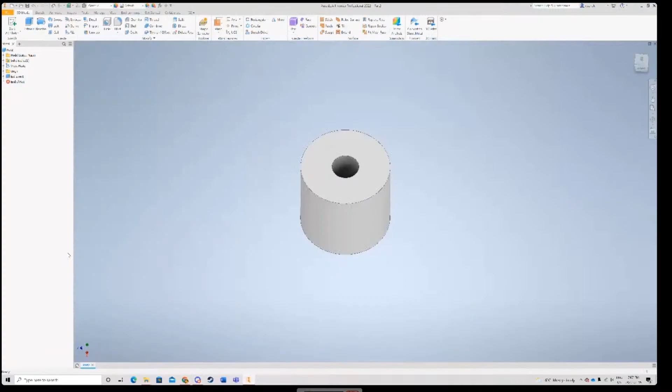Okay, I'll continue. So now that we have this extruded, we're just going to fillet the corner. We're going to fillet it 2 millimeters, just like that. And now we should have this shape. It's basically just like a dome.

So now that we have this, we want to actually toggle the visibility of the XY plane. To do this, in our model tree on the left-hand side, we're going to click the drop down on the origin, and then select the XY plane. We're going to right-click it, and there's a button that says visibility. We're just going to click on that, and what that's going to do is bring up this center plane that we have over here.

And from this, we are going to want to make 3 offset planes from this plane. Basically, this is defining the planes that the propeller blades are going to loft through. If I go up to the top, there's a tool called the plane tool, the work plane tool. It's like this orange square with a white square in it. We're not going to click on the tool, but we're going to click on the drop down, and select offset from plane.

Hey, sorry to interrupt, but if you have a version of the part you're going to make saved somewhere, would you mind opening it up just to show what we're trying to make today? Yeah, okay, sorry, I should have mentioned that.

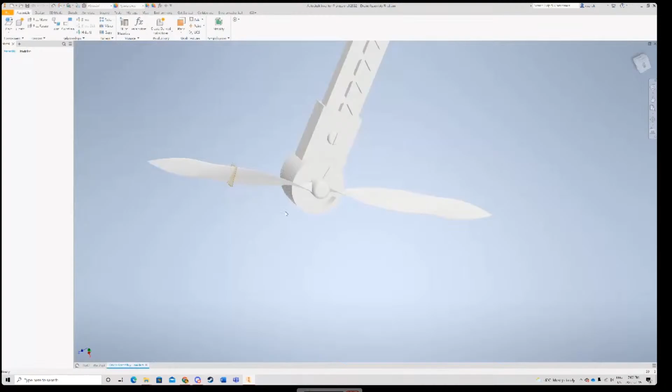So basically what we're making is this propeller blade. If you attended some of our other workshops, you may recall we had a drone body with a drone assembly, so I have this open here too. We made this a while ago. Basically what we're doing is making a more advanced version of this propeller that can fit on top of this motor housing the same way that the one provided to you will. So it has the same inner and outer dimensions as this one, but it's got a bit more of a complicated shape, just so we could show off some Inventor tools, mainly focused on making more advanced lofts in this workshop. So this is the final product we're going to be working towards, just so you guys can have an idea of where we're going. Thank you for mentioning that, I'll keep that open.

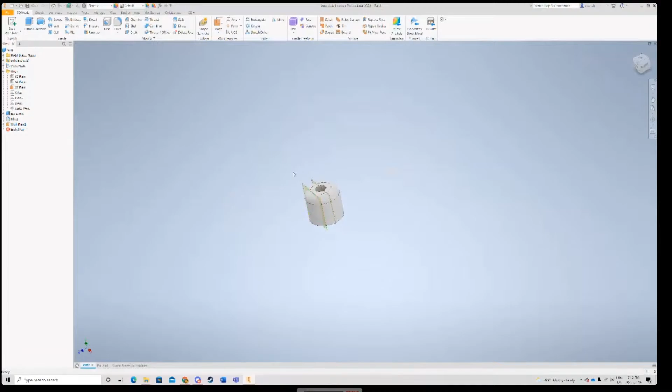So what we're going to do next, now I'm back to the part, is we're going to offset from this XY plane. We're going to make 3 offset planes. One is going to be 3 millimeters out. Here, I'll turn this around. And if you didn't know, you should always use Inventor with a mouse, not a trackpad. I know some people did that in first year, but it's so much better with a mouse. You can shift middle mouse to rotate around the center point.

So I made this first plane 3 millimeters offset from the origin XY plane. Again, from the origin XY plane, I'm going to offset another plane, and this plane is going to be 33 millimeters out. Then I'm going to do that one more time. Again, all 3 of these are coming from the center XY plane, and this plane is going to be 100 millimeters out. There we go, so 3 planes that look just like this, and this is basically what you should have. So these 3 planes are going to be the surfaces that we're lofting through.

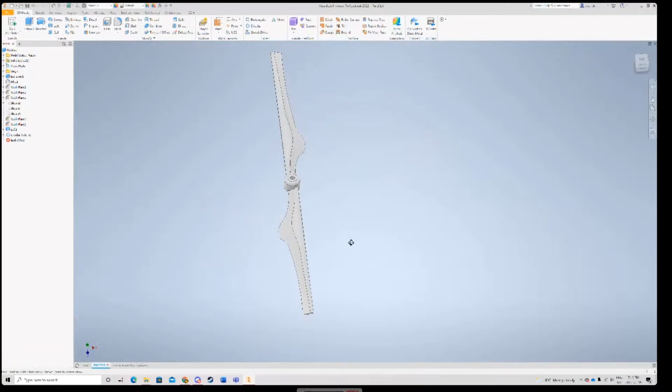If I go back to the final product, you can see it's kind of angled downwards here, and angled downwards here. So we're going to make 3 sketches for this loft to follow along. The first plane we're going to start with is the 100 millimeter plane, all the way on the end over here. So we're going to start a sketch on this plane. Sometimes the body might be rotated, so to change that, you can use this cube, clicking these arrows on the sides to rotate the view properly if it doesn't look right, as a quick way to orient it correctly.

We're going to use this tool called project geometry at the top when we're in the sketch on the 100 millimeter plane. What we want to do is project the body of this cylinder, so we're going to make sure the body is highlighted here, like this circular ring. That's going to give us the top and bottom projection of this cylinder. And then we also want these lines on the side to make a rectangle that has the dimensions of the projection of the cylinder.

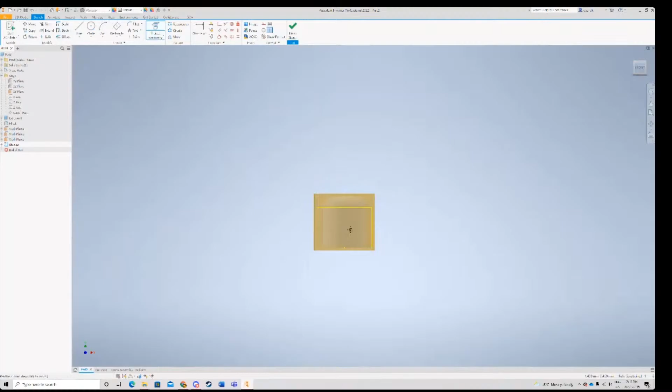To get that, you'll need to move around on the cylinder. You'll find this line on the left side. If you click on that, you should get a line that appears on the left. On the right side, there should be not this one, because this line is actually the inside of the inner cylinder. But if you go more towards the outside and click on the edge, then you should have this rectangle, and this is what you want. You should have a rectangle that looks like this. Once you have that, you're done with the project geometry tool for now, so you can just press escape to get out of that.

Then you want to make a center line down the middle of the part. I'm just making a line that's going from the top of this to the bottom, dividing the projected rectangle that we made into two parts.

Now the next thing we're going to do is use the 3-point center rectangle. If you click the drop down in rectangle, you can find it over here. Before we actually make our line on this sketch, I want to change to construction mode. If you see where my cursor is highlighted, there's a button that says construction. Basically this just makes the lines dotted instead of solid, and that makes it easier to see what is actually part of the part and what you're using to line things up. So I just selected that.

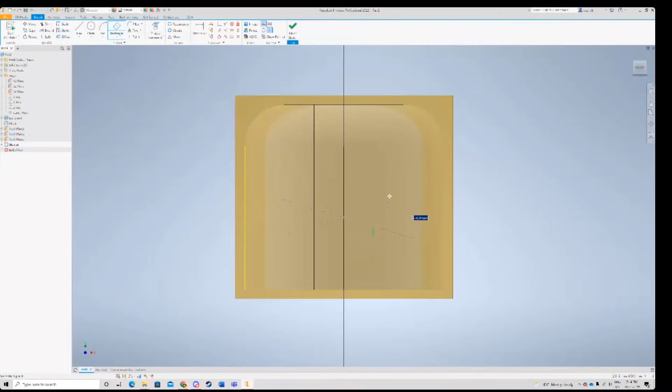Now, still in the 3-point center rectangle tool, I'm going to select the middle point. You can go up and down along the center line, and it'll turn green at the middle point. I'm going to click once in the center, and make a line that is 7 millimeters long. For degrees, just keep it at 0. Then I'm going to make it 1.6 millimeters high. So then I should get a rectangle like this that is dotted, and it'll have these crosses on it as well.

Once I have this rectangle, I'm going to make one more dimension, not with the rectangle tool, but just with the line tool. I'm still inside of the construction line view. I'm going to click from the top of the rectangle we just made, not from the center, but from the top of this rectangle. I'm going to go over to the right 1.75 millimeters, 0 degrees, and just dimension that over there, just like that.

Now I'm going to exit out of the construction line view. At the top, I'm just going to deselect construction over here, and this is going to make it so we can just make those solid lines again.

The next tool that I'm going to use is the 3-point arc tool. What this does is basically make an arc where you can define the endpoints, and you can also define the center point of the arc. To define this, I'm going to click once on the bottom left-hand corner of the rectangle we just made, then click once on the top right-hand corner of the 1.75 millimeter line we just made, and then define the radius of the arc to be 15 millimeters.

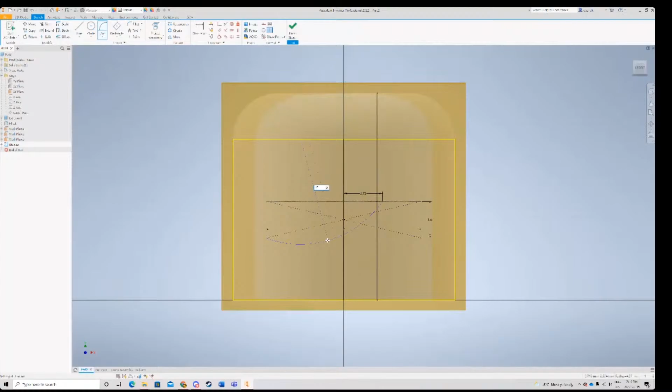Now you should have a line that looks just like this, with an arc that looks about this shape. We went from the top right corner of the 1.75 millimeter line to the bottom left-hand corner. And this black line, just ignore it—Inventor just kind of makes those sometimes to line things up.

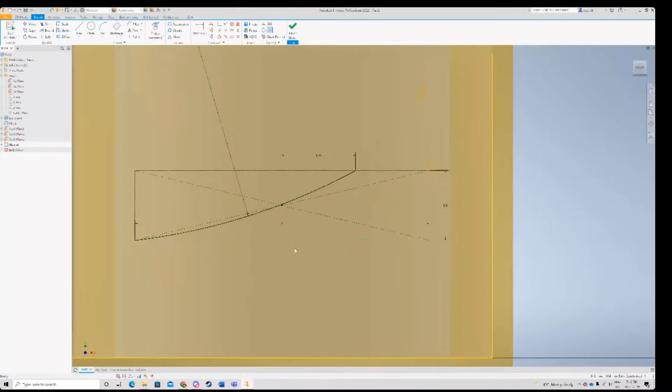Now that we have this line, we're going to draw a line along the bottom of this rectangle to make it real. I'm not actually going to draw a line here. What I'll do is select the construction line at the bottom, then click the construction line tool we used earlier, which will toggle it from being a construction line to a normal line. So now it's solid instead of a construction line.

Hey Kieran, just to make it easier to see, there's a button at the bottom of your Inventor, the one to the left of that one. Oh yes, slice graphics, if you just enable that. Oh okay, it looks like it didn't really do anything. Okay, never mind, never mind.

So what that button is supposed to do is, when you're making a sketch on a plane that's sort of inside some geometry, it basically gives you a section view of the geometry. But I forgot you were sketching on a plane that was all the way up there. I think that'll be useful though when I go to the 3 millimeter plane, because the way I did that was I toggled the visibility, but instead that could be useful. Yeah, sorry, keep going. No worries, okay, what I'll do is angle the view a little bit so it doesn't have all these planes in the background, so it's a bit more clear what's going on.

So yeah, anyway, where were we? Okay, so we just made this line. The next thing we want to do is make a fillet that's going to give that aerofoil shape of the wing. So we're going to use the 2D fillet tool, up here right next to the rectangle tool, and we're going to make a 1.5 millimeter fillet.

For the 2D fillet, you want to enter the dimension before you actually make your selection. So radius of 1.5, and it's going to be between this line we just made, this arc, the 15 millimeter arc, and the most right-hand construction line. It should highlight green like this. If you click on the two, it should make this arc that gives this kind of smooth shape.

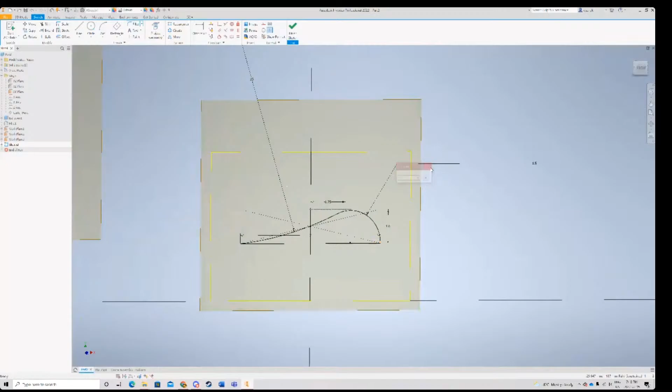This part is a little bit annoying because it doesn't actually join up with the edge, and this is something you're going to have to pay very close attention to. So now we want to close the gap between this line, this arc, and the bottom.

What we're going to do is zoom in all the way on this corner. You'll see this construction line is dotted. The same way we did before, we can just turn that into a real line, and this should be joined now. Actually, I'm not sure if that exactly joined it.

I think a better way might just be to make a line that connects from the bottom of that corner to this bottom corner. Your line should be 0.048 millimeters in length, so just double check that your line is that length, because if it's not, that means you probably selected something a little further up. But yeah, okay, so that's how we did that.

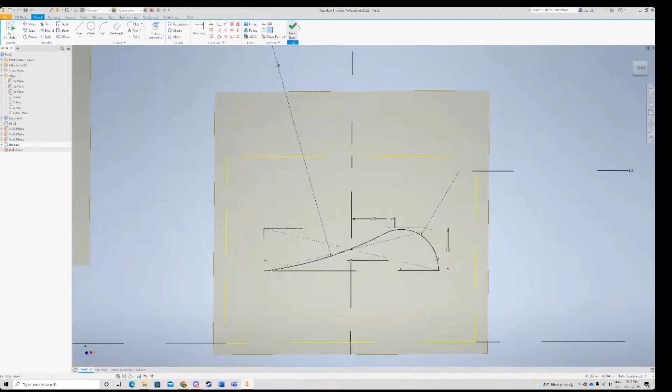So now we're basically done with this end sketch, so we can just finish that sketch over there. Going back to our final part, what we just made was this very end sketch. You can see this is very far out from the body, so that was the purpose of this sketch, to define the endmost plane.

Now the next thing we're going to do is try to get that body rotation. If you notice, this has this bent shape, this bent sort of geometry. To get that, we're going to make a new sketch on this work plane. But before we do that, I'm going to toggle the visibility of our solid body so it's a little clearer what we're doing. I think one more thing we can do is also use that section tool.

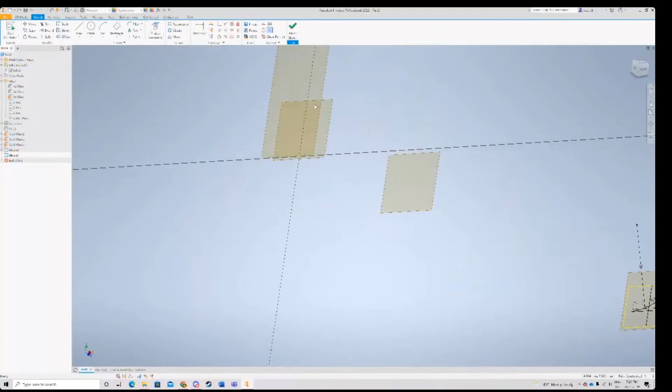That section tool also, but I'll just turn the visibility off for now. So I'll make a sketch here on this first work plane. Keep in mind, this is not the plane that divides the solid body in half. It's the one that was offset 3 millimeters from the center. So that's the plane that we're making a sketch on. This one right here, not this one.

So once we made this sketch, what we're going to do is we're going to project our geometry all the way down from the sketch that we just made. And these are the geometry pieces that we need. So we need this entire aerofoil shape. So we're going to click on this curve, the bottom curve, the fillet curve, and we also need to remember to select that tiny little piece.

Oh shoot, where is it? Sometimes Inventor is a bit finicky. We also need to select that tiny little piece that we use to, oh, there it is. Oh my God. I had it for a second there. Jeez. I think maybe I should delete that construction line. Oh, of course, now it wants to select. Oh, really? I didn't know that. Okay. So if I just curve. Oh, there we go. Awesome.

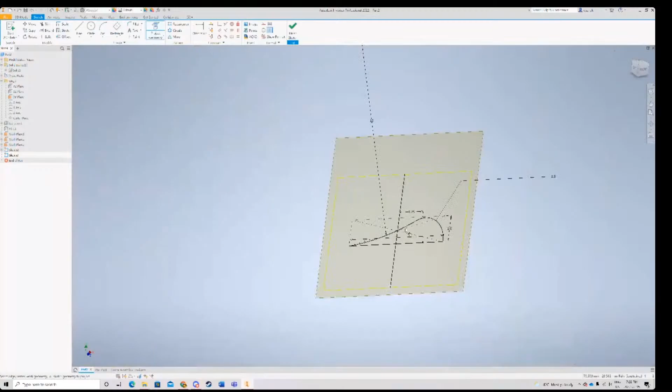Thank you. So yeah, just make sure you select the one that's solid and not the one that's dotted. Awesome. Thank you so much. I actually did not know about that. It's an awesome tool. So we have projected those four, and now we just need to project the center line. So those are the 5 lines that we need to project down from our sketch. So the entire curve as well as the center line that divided it in half.

So now we can exit out of the project geometry tool. We can forget about this sketch that we made. We're going to focus on this plane over here. So we actually don't want this curve to be associated anymore with the tool that we projected it from, because right now it's kind of bound. Like it has a constraint that says it has to match the projection of this curve. We want to get rid of that.

So in order to do that, we're going to highlight all of the selections that we just made. So again, 5 lines you should have. We're going to right click and we're going to click on break link. And it's going to be unconstrained, but that's all right for this workshop. Now we should have basically still an identical projection of this sketch down onto this plane, but it's no longer linked to the geometry of the other sketch.

So now that we have this, we want to rotate this 25 degrees counterclockwise around the center point of this aerofoil shape. So how are we going to do that? What we need to do is we actually need to break this line. And in order to do that, we're going to use the split tool. The split tool is up here. If you go next to the 2D sketch, it's right next to rotate, between rotate and offset.

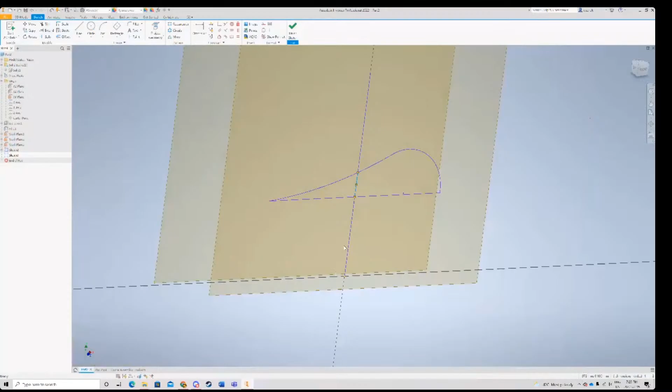The reason why we did that is because now we can use the point tool, which is right next to the rectangle tool. If you see where the 2D fillet button is under text, the bottom one right there, point tool. And we can make a point that is right in the center of this new line. We couldn't have done that before, because it would have locked on to the center of this long line, which is not the same as the center of this small line. So now that we have this, we're going to make our 25-degree rotation around this center point.

So we're going to do that by clicking on the rotate tool. The rotate tool is right next to where that split tool is that we just used. So now that we clicked on the rotate tool, we have to specify two things. We need to say what lines we're rotating and what point we want to rotate the lines about.

So make sure that you have the top box highlighted, not the bottom box. And when you have the top box highlighted, you want to select everything that we use to make that aerofoil shape. So that includes these 3 big lines and this one corner line. I know this is really annoying, but it's important not to forget about this one small corner line, because if you do forget about it, the sketch won't be closed and you won't be able to do your lofts correctly.

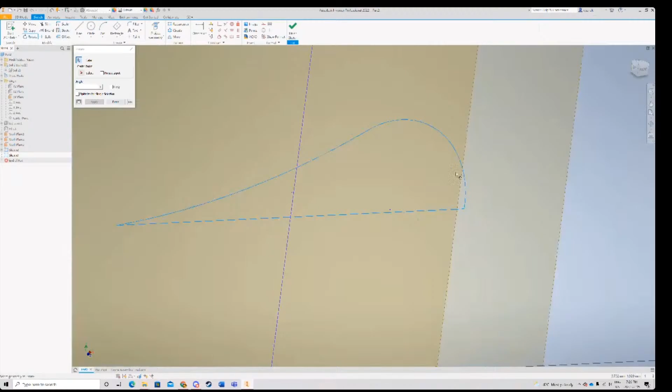So each time, just keep in mind 4 lines pretty much. You need to be selecting them at all times for the aerofoil shape, because those 4 lines create this closed shape. So now that we have those 4 lines selected, we want to click on the center point dialog box. And for this center point, we can just select that point which we just made. The cursor should turn green when it's right in the center over there.

You'll get this pop-up which is saying it's constrained to other geometry. That's just because I think the point has a perpendicular constraint to the line, but you can just select yes for this prompt. We don't really care too much about the constraints here. Half the sketch is unconstrained anyway. And you can see the angle box is highlighted. We just want to type in 25 and then hit enter.

And now we should have this kind of shape with the aerofoil on one end being angled 25 degrees downwards, and on the other end it is straight. If we zoom all the way out, this is what we should have at this point in the sketch. So hopefully all of your sketches are looking like this. It's basically the same sketch but rotated 25 degrees about this point on both ends.

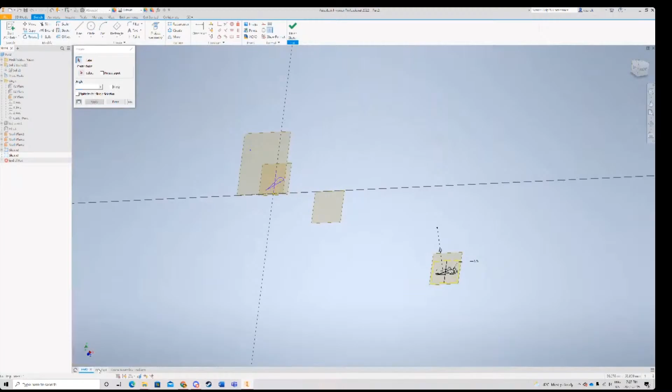And if I compare it to the final part, you can see how we're getting there. The 25-degree rotated sketch, if I highlight this, you can see it's on the far end. The straight sketch is on the other end. The next thing that we want to do is make this middle shape. So where it's bulging outwards, we want to make the sketch that defines that.

So in order to do that, oh, sorry, I should have said we can exit out of this rotate dialog box. We can finish this sketch. Now we want to go into the center work plane, which was 33 millimeters away from the main plane. So we're going to start another sketch on this plane.

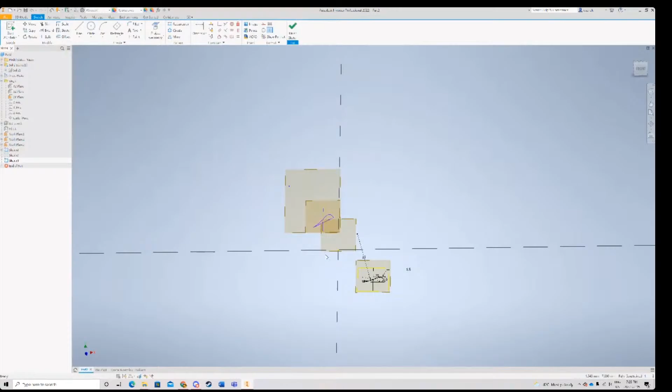Once we started the sketch here, we're going to project a couple of lines down to help us make sure that everything is lined up correctly. It'll just make our lives a lot easier when we're making this center sketch. So the lines that we're going to project, again using this project geometry tool, it really helps out a lot when you're trying to do this kind of thing with repeated lofts with similar shapes.

So we want to project this whole box from the first sketch that we made and the center line. And then from the second sketch, we want to project this line that's angled downwards. So I'll highlight that again. This bottom line that is angled downwards at 25 degrees is what we're projecting from this sketch. And this whole box outline with this middle line is what we're projecting from the first sketch. Once we have those lines, we can exit out of the project geometry tool.

The next thing that we want to do is make a rectangle, but it is a construction rectangle, just like before. So I'm going to click on the construction tool to change the lines that we're making from solid lines to construction lines. And then once again, actually, I don't think we use the 3-point center here. We just use a 3-point rectangle.

So we don't use 3-point center, we use a 3-point rectangle. And the reason why we use a 3-point is before we were making the rectangle from the center of the shape, but now we want to define the rectangle from one corner to the other corner and then the height. So make sure, once again, just use 3-point, not 3-point center.

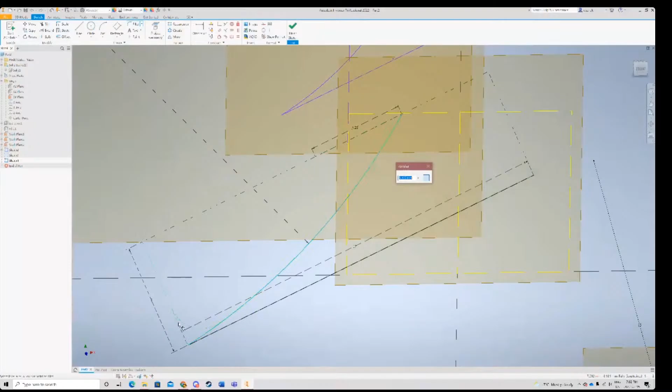Oh, what the heck? Oh, I think I accidentally had the bottom selected. Just gonna undo that. So a fillet between this arc that we made, the 3-point arc with the 27 millimeter radius, and this side. And sorry, this should not say 1.5 millimeters. That is why I'm not getting a selection. This should say 4 millimeters. And now you can see if I highlight this, it'll give me the little preview. Preview basically indicates that you're good to go whenever you do a tool.

And I don't know why it keeps sending me back to the construction lines, but anyway, I'll keep going. Once again, just close up this gap over here on the right-hand side. I think this is what was causing the problem. I think it is okay just to change this line from a construction to a solid line. I think what was interfering before was just this dimension tool, and that's what I was highlighting. We should be good if you just highlight this bottom right-hand line and turn it from a construction line into a real line.

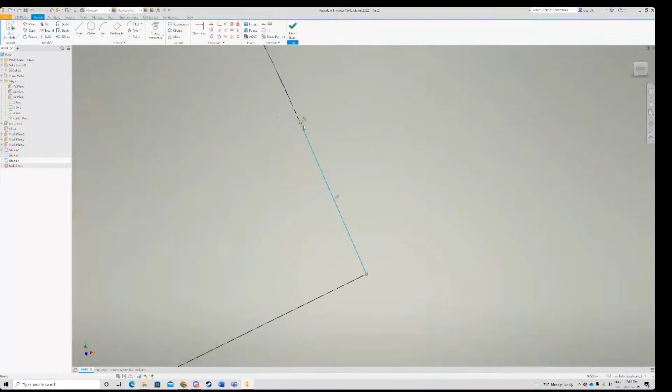But if you decide to just make a line, it should be 0.36 millimeters from this corner down to the bottom, and that's so you know that you selected the correct 2 points and you successfully bridged the gap. So, I believe that is it for the center sketch, actually.

So now you can kind of see how this is coming together. We have these 3 profiles, and we want to make a loft between the 3 that will make this part. And you might think, okay, well, why can't we just do this loft right now as is?

So I will show you why. If we select this plane and then we try and loft through these 3 sketches, and then I click okay. Oh, I forgot, it was not visible, so I'm just going to toggle the visibility for now. You can see we get this taco, quesadilla-like shape, which isn't what we were really going for at

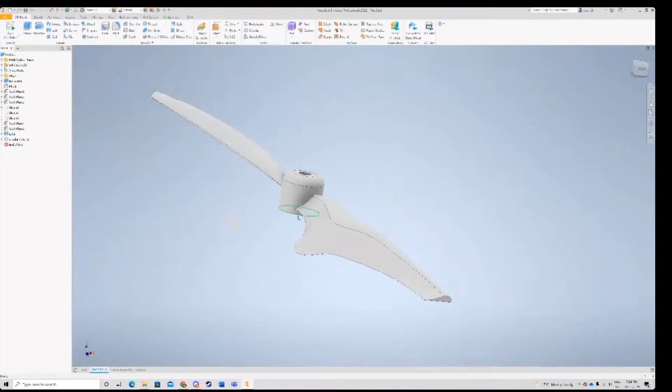all with this part. And the reason why is because Inventor just takes the smoothest path between 3 profiles when it does a loft. If we want to actually get this cool aerofoil type shape, we need to tell Inventor what lines it needs to follow to make the path. And to do that, we're going to make use of something called rails. So if you click loft, you can see there's this selection that's called rails.

And I don't think you really touch on this at all in first year. But basically what the rails feature does is it allows you to define the path that the loft is going to take. So the rule for rails is that they need to be touching the sketch at all times. All 3 profiles that you loft along, the line for the rail needs to be touching all 3 of the sketches at all times. So how do we achieve that?

Well, we have 3 sketches, and you guys are taking linear algebra now, so I don't know if you learned it yet, but hopefully you should know you can make a plane out of any 3 points in a vector space. Okay, maybe I'm giving you guys PTSD, but I'll shut up about linear algebra.

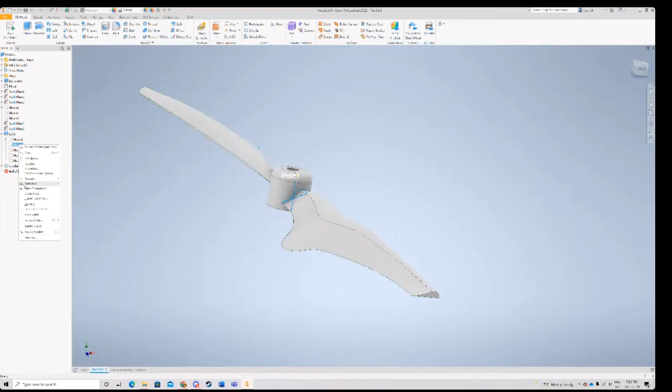So you go to the plane tool, and there's a 3 points selection over here. This is actually what we're going to select, the 3 points tool. And I'm going to go back because I think it's good to visualize what we're doing. Oh man, I should have unhid these sketches, so I will do that really quick. Sketch 3, sketch 4, and sketch, not this sketch. That is, spoiler alert, what we're doing next.

But you can see that we are basically defining a line that's going along this edge, and then we're also defining a line that goes along the back. So the points of intersection that we're going to use for the rails are these corner points from each sketch, and then the back points from each sketch. So in order to make sure that our line is always touching the sketch at those points, we can make a new plane that is defined by those 3 points.

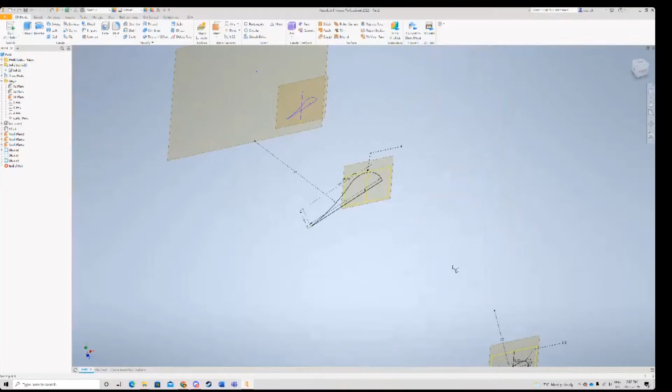So in order to do this, we can click on the plane dropdown. Okay, I've done this like 4 times. And then you click on 3 points. The 3 points that you choose are the corner points from each of the sketches. So we choose this point over here, this point over here, and this point over here. And Inventor will automatically make a plane with all 3 of those points lying along the plane.

And we can do the same thing, basically. We could do it now, or we could do it later. Okay, I'm just reading the handout. It looks like in the handout we do it right now, so I'll do it right now as well. It might look a little messy, but we can clean it up later. So we're gonna use the 3 points tool once again, the exact same tool.

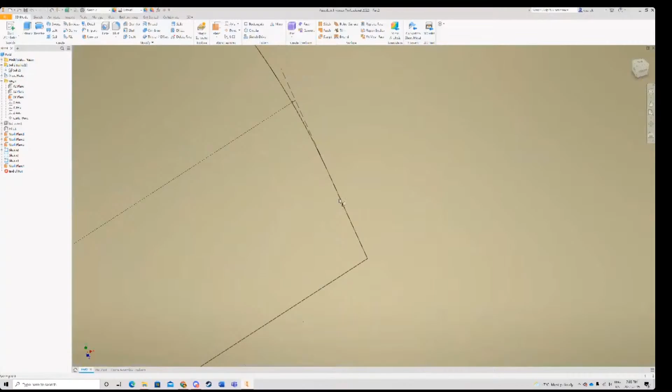And once again, I'm gonna stress, if you remember, we had this corner line, this small corner line that we made. We want to select the very corner of the aerofoil shape, not this line. If you zoom out, you can see that there's actually 2 small points here, and it's very easy to confuse which one you select. So you want to make sure that you're selecting the very corner of each of the 3 shapes.

So we're going to select the very corner over there. I'm going to zoom in a ton, make sure I'm selecting the very corner of this one. And we're going to go over here and I'm going to zoom in a ton again, and make sure that I'm selecting the very corner of this one. So now I have 3 lines that are going through the back corner of these 3 planes.

So now what I'm going to do is I'm going to go onto the first plane that we made. So the first plane that we made was between these 3 left-hand pointy parts of the airfoil. And I'm going to make a sketch on this plane.

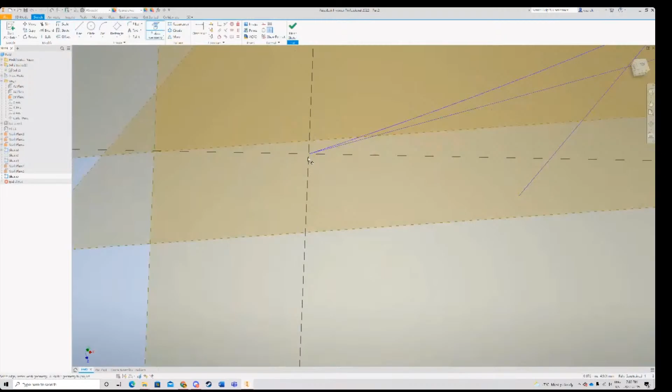Now, even though we defined the plane to have these 3 points lying on it, these 3 points aren't actually defined in the plane. You can't lock onto those 3 points at all. If you make a line, if I try to select that point, it won't actually be there on the plane. So in order to have those points to lock onto, we need to use the project geometry tool once again. And we need to click in a very similar fashion to how we made the actual plane. We need to click on the three tips of the airfoil.

So once again, I'm just going to go 1, 2, 3. And then you should have these 3 little point dots from those 3 tips. So now that we have that, I'm also going to project one more line. And this is just going to make things a little bit easier for us, just to line things up. The same reason why we projected these lines, to help line everything up for how we were making the airfoil. I'm going to project this bottom line from the center sketch.

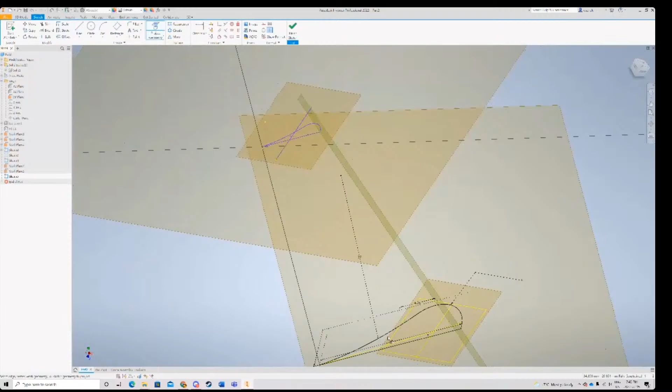So the same way we projected this line onto this plane, we're going to project this big line onto the bottom plane. And it's going to give us this line at the bottom here, basically this yellow line. And I realize now there's a lot going on the screen. So I'm just going to finish this sketch. I'm going to come back to it, but I'm going to hide some of the other sketches just so that it's a little bit easier to see what's going on.

So I'm going to hide sketch 4. I'm going to hide sketch 3, and I'm going to hide sketch 2. And this is just to clean it up a bit, because there's so much going on in all of these 3. It's a little bit hard to see what we're doing. I'm going to go back into that sketch now. So I'm not going to make a new sketch. I'm going on the model tree and I'm clicking on the sketch that we just made and I'm re-entering it. And this is the sketch we projected all of the points onto.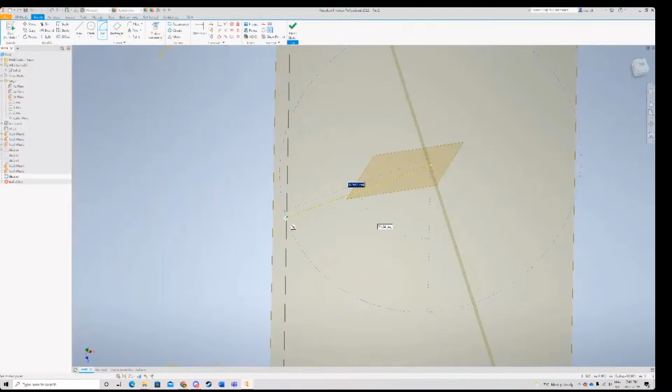So now that we made this sketch, what I'm going to do is I'm going to make a center point arc. So the center point arc is going to be from the line that we just projected. So the very right hand end of the line, or I guess it depends on how you have it oriented, but in my orientation, it's the right hand end of this line. And we're going to go down to the end of that center airfoil, where the point was projected onto. And then we're going to make a 60-degree arc.

And in the handout, actually, this is my bad. I should have maybe specified a little bit more. But it's actually mirrored. So there's a 60-degree arc over here, but this isn't the full arc. So what we're going to do is we're going to use the mirror tool, which is in pattern under circular. And we're going to mirror the 60-degree arc. And we're going to use that center line that we projected as the mirror line. Then we can click apply and we can see that the arc has been projected all the way across.

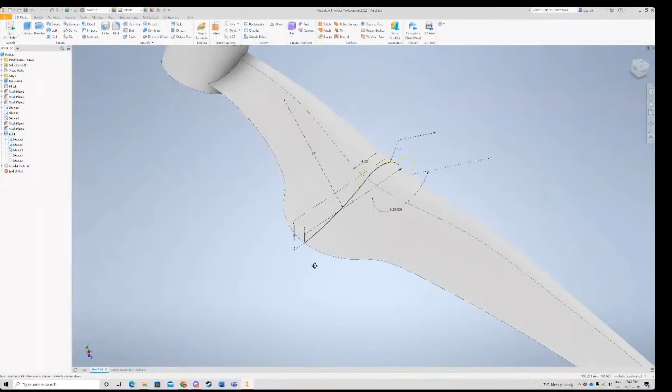Okay, one sec. This looks like it's going a little bit too far. Maybe it was a 30-degree. This looks more correct, but 1 second. Sorry guys, just give me a second here. I want to make sure I'm doing this correctly. So on the final part, we go into this sketch.

Okay, so it is actually 60 degrees from. Okay, it is actually 60 degrees from this line. All right. Oh, sorry. I should just close out of this assembly.

Okay, so that is actually 60 degrees. That's my bad. Okay, so once we have that 60-degree arc, we're going to change from, and keep in mind...

We use the center point arc tool there, a different tool than what we were using for the rest of this project. We're using the 3-point arc tool. That's why I didn't have to define a third dimension. But now we're going to go back to using the 3-point arc tool.

So for the 3-point arc tool, what we're going to do is click on the left-hand point that we made. This is for the sketch closest to that cylinder, not the sketch on the far end of the airfoil. This is the sketch on the close end that is offset by 3 millimeters from the center, and intuitively, it's the one closer to the arc we made.

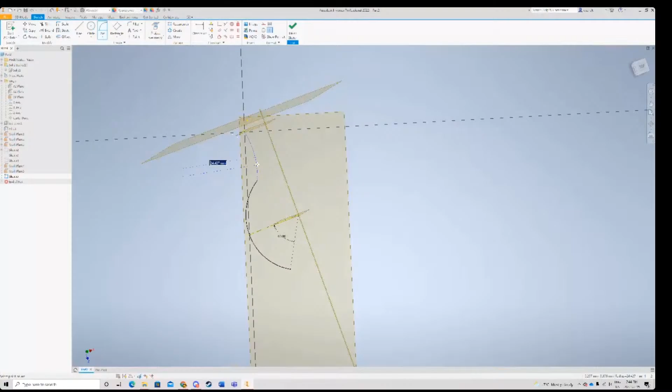So we're going to click on that point, the point joining to the arc, and we're going to make a radius of 35. And it should look like this.

And we're going to do a very similar thing between the right hand arc that we made and the point at the very end, and we're going to give this one a radius of 220, I just forgot the dimension there. So we should have something that looks like this.

Now what we're going to do is, this shape is a little bit ugly, so we're just going to smooth it out by using the Fillet Tool. We're going to give it a 2D fillet, 8 millimeters between this arc and this arc, and then also this arc and this arc. It's going to unconstrain the left side, but that's fine.

Now we have this shape that looks a lot more... oh my god, sorry, I don't know if you can hear that fire alarm in my house just started going off. Okay, never mind, it's good now. I guess my roommates figured it out. Hopefully my house won't burn down.

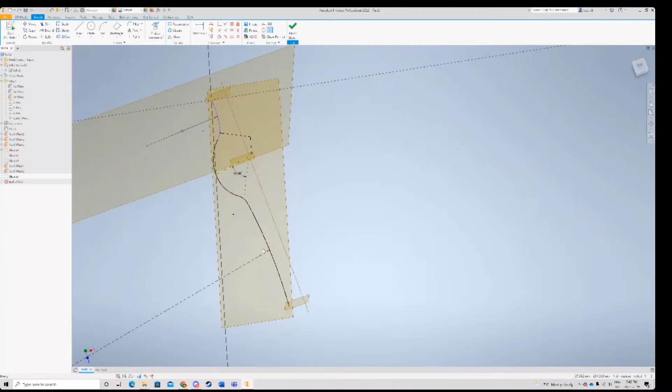But that should be good, actually, for this part of the sketch. That should be everything that we need. We have this 60-degree arc, and we can just finish the sketch off now.

So the next thing that we want is to do the back side. This is kind of like a long, skinny plane. Might be hard to select, but this is now what we're going to be working on to make the rail for the backside. So we're going to click this, click on Create a Sketch.

Now that we've done that, what we're actually going to do is... oh, sorry. Before we create a sketch, I'm going to re-toggle the visibility of all those sketches that we hid earlier.

Okay, awesome. So now these sketches are back. Now that these sketches are back, we're going to make this new sketch on this skinny little plane that we made. Very similar idea to what we did over here.

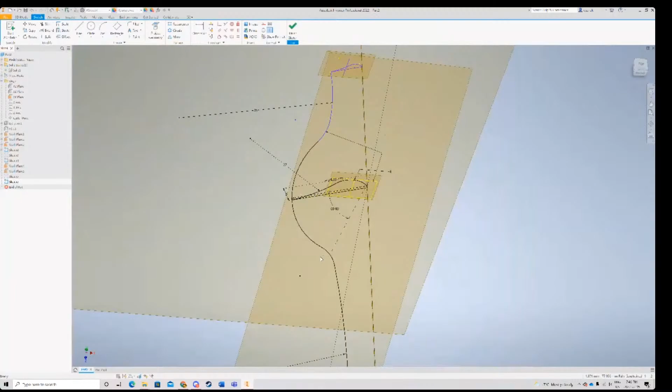So again, the reason why we made these sketches is because think of rails kind of like train track rails. Train track rails need to be touching the train at all times, otherwise the train will derail and won't go in the direction you want it to. Same way, think of the sketches as the train, and the rails as the train rails.

So it needs to be touching the sketch at all times. We can ensure that it's touching the sketch at all times if we make a plane that is touching the sketch, touching through all the sketches at all times. I might have explained that really badly, but sorry about that.

So once again, we're going to want to project the geometry. We're going to want to project all 3 corners of all 3 sketches. Again, I want to keep stressing, make sure you're projecting the correct point in the corner here, because if at any time you don't project the right point, your loft may not work correctly.

So this is also a good time to check that you actually made the plane correctly, because if you did, when you project all three of these points, they should appear on the plane at the identical location that you clicked on.

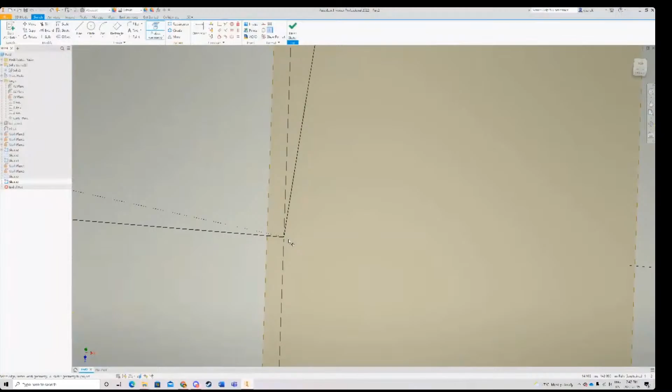If, for example, I click over here, you can see that the yellow point doesn't actually appear where I'm clicking. It appears slightly off. Oh my god, what did I just do? Okay.

It appears slightly off to the side, which means the plane isn't actually lying along that point. If you click on this bottom point and find it's not appearing exactly at the point, I'm going to delete that. That means you probably accidentally made your plane through 3 points using the top of this line instead of the bottom. So you want to redefine that plane.

Okay, now that we've done that, this part is pretty simple. We just want to make a smooth line going from this point to this point to this point. To do that, we're going to use the Spline Tool, specifically the Interpolation Spline Tool, not the Control Vertex Spline Tool, because the Interpolation Spline Tool will make a smooth curve that always goes through the points we selected.

This one is very simple. So we use the Interpolation Spline Tool. All we do is click from point to point to point. So we click on this point, then we click on this point, and then finally we click on this point.

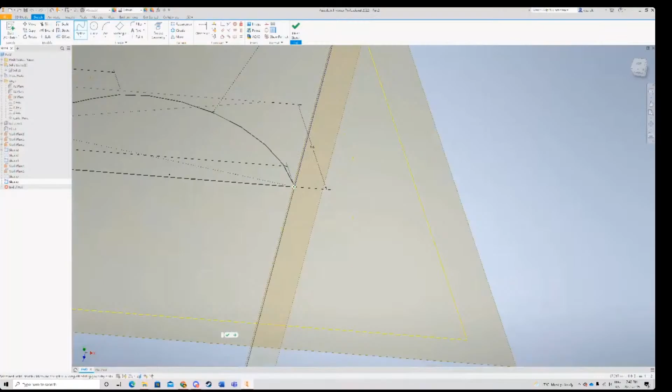Click check. Sorry, actually I just realized... okay, everyone's still here. I just wanted to make sure, like, it was kind of quiet. I wanted to make sure my Wi-Fi didn't cut out, and I was getting worried actually. So okay, good that we're still live.

Okay, awesome, so now we're actually basically almost done this part. I'm gonna hide a couple work planes and talk a little bit about what's going on. I don't know if there's a faster way to mass hide all of these instead of selecting them manually, but I'm just going to select them manually. So these are the sketches that we made, and it's kind of cool, we made almost a wireframe model of what we're doing.

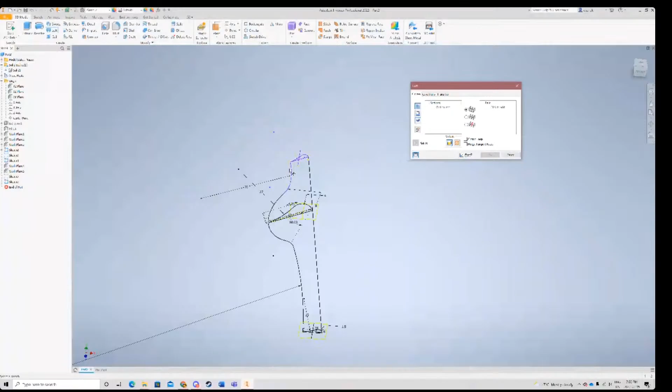So I'm gonna go back into the loft tool, and when I click the loft tool, you guys should follow along and do this as well. I'm going to loft from the back plane through the center plane and through this - you have to click to add another sketch - and through this back plane all the way at the end. Make sure when you select these 3, you're not selecting the box, you're selecting the inner airfoil shape.

You can see now that it's making this taco shape. So basically what Inventor is trying to do here is loft through all 3 of these planes using the smoothest possible line between these 3 points.

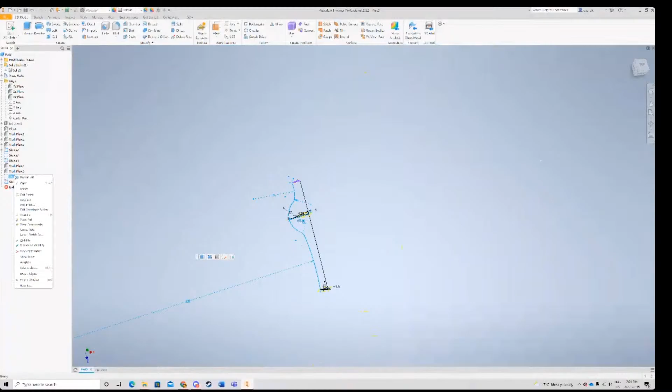So actually, before I go on to do the rails, I'll show you an example. That smoothest possible line is exactly what the Spline Tool does. If I go back into the sketch we made, these 3 lines along, and I make a control point spline between those 3 points touching the curve that we're lofting along, you can see that this is basically an identical profile to what the loft was doing - the same taco bell shape, if I use the Spline Tool and click from point to point to point.

And Inventor basically just does that everywhere - it makes a smooth spline between the points defined on the surface when you just use the loft tool with nothing else defined. But if you want the edges of the loft to follow a different path - oh my gosh, sorry, this is not what you want to do - click to add, select the sketch, then I select this, and then we add another selection here.

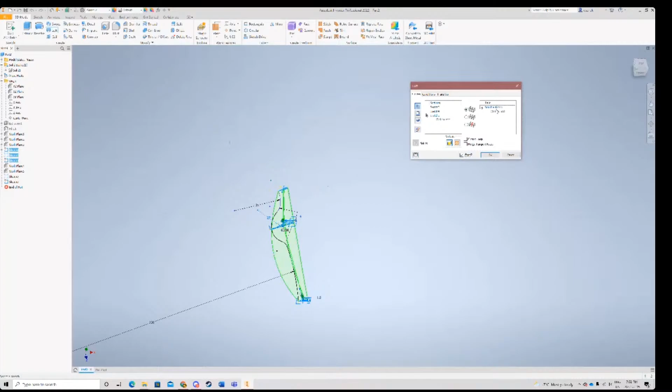Over here, awesome, we can instead make it follow a different path, and that is what these rails are for. So if I select, for the rails, I'm in the rails menu now - if I select this line, this sketch over here and this line, you can see that now on this end it's actually following this profile. But you can see the back, it's no longer doing a spline, it's making this weird wavy shape.

And the reason why is because once you define a rail, it kind of tries to mirror that rail - unless you do more and more rails to define exactly how you want your shape to be, it's going to try and mimic the shape on the opposite side. So that's why we made this back end rail, because this back end rail is going to restore that spline shape, and you can see that that's exactly what it does.

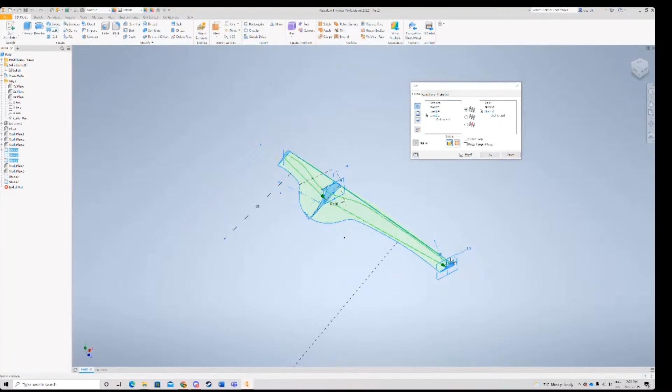When I clicked on that back end rail, we have this nice uniform airfoil shape going all the way from one end to the other end of the propeller. So I'm going to click OK here, and it's going to disappear. That's because I forgot to toggle the visibility back on. So if I turn the visibility back on, you can see that now we have this airfoil shape, and this is basically identical to what we had.

Oh, is this the same part? What am I doing? I'll just finish the sketch. No, it isn't. Okay, never mind.

So this is pretty much the same thing that we have over here, but instead, this one has 2 airfoils and this one has 1. So how do we get the second airfoil? It's very simple. You might be thinking we use the mirror tool, but we actually don't.

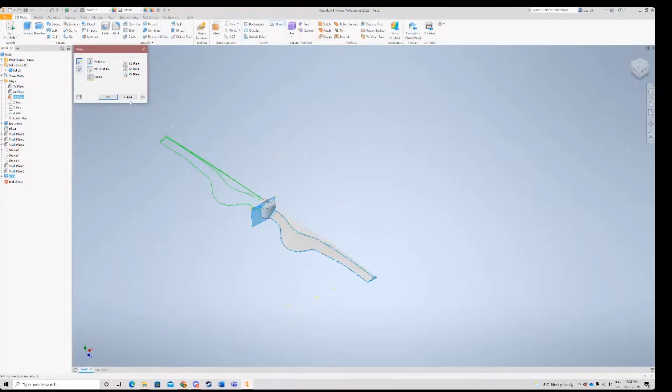The reason why is because if we use the mirror tool, I'll show you. So if I turn this mirror plane on, we don't actually get the shape that we want. We get the same thing on the opposite side, but that's not what we're looking for. We're looking for basically this to be rotated 180 degrees. And there's not actually a rotation tool up here.

So instead what we can do is cheat by using a circular pattern, which is kind of the same thing. I'll just rehide this plane because we don't really need it. The circular pattern tool is up here in the pattern menu, right next to the plane menu. We select it, and then there are 2 things we need to define.

We need to define the feature and the rotation axis. The feature we can just select as the wing that we just made. You should just be able to straight up select this big wing, and should have no issues with that. Make sure you don't select the center.

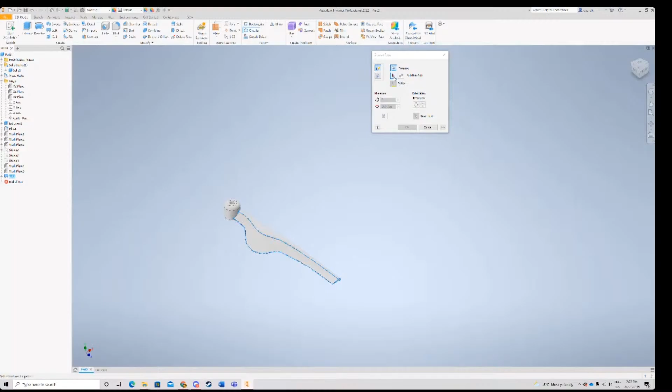Now the rotation axis, instead of a point, remember we're not in 2 dimensions anymore, we're in 3 dimensions. So instead of a rotation point, we now need a rotation axis. And to get this axis, it's very convenient that this is a circle. We can select basically anything on the circle - the inner cylinder, this outer fillet, the body. As long as it's circular, this will give an axis for it to rotate around.

So I can show you, if I wanted to select the inside, it all has the same effect. It's not changing at all what it's being measured on. That's because they all have the same axis, the same central axis.

But we don't want 6 wings over here, we only want 2. So I'm going to do a placement of 2 with 360 degree current angle. We could also do 3 wings too, I guess - this actually looks kind of cooler in my opinion with 3 wings. Maybe I should have made the handout with 3 wings, but whatever, too late.

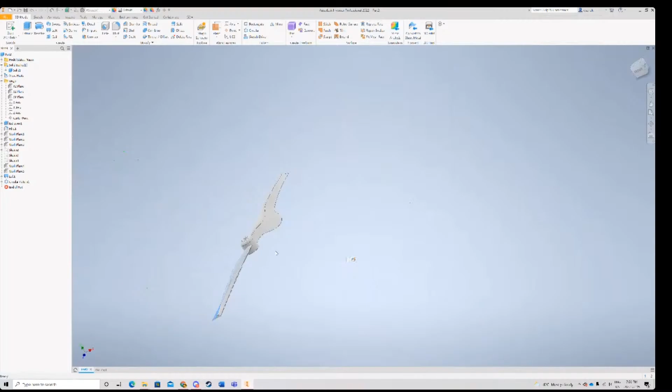Make the placement with 2 wings because that's what we did over there, and we just click OK. That's pretty much it, that's how we make this shape. You can see it's a much more complicated propeller shape than what we usually make, and this is kind of an introduction on how to use the more advanced part of the loft tool.

And maybe I'll also mention these other ones. So I'm not going to lie to you, I've never used this third one, this area loft, in my life. I don't really know what it does, but seems like we have more time than I anticipated in the workshop, so maybe we can figure it out. But before we do that, I'll talk about what I do know.

So instead of rails, which is what we did for this sketch, where we have these outside profiles that we loft along, we can instead use a centerline tool. Basically what you can do with the centerline is it kind of shows you - it's nice, it gives you a preview of exactly what the tool does. Instead of defining rails along the perimeter that are tangent to each of the sketches, you have to define a line that goes through the center of each of the sketches.

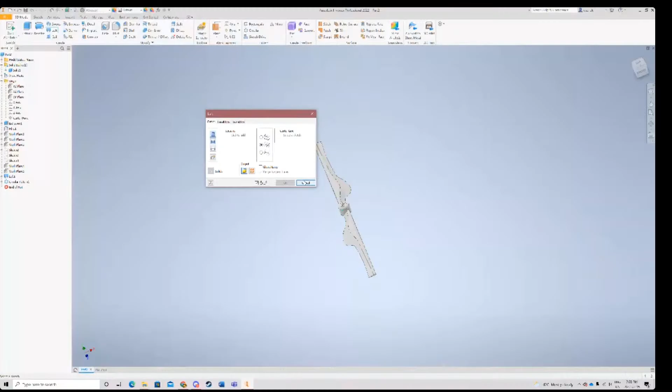So it goes in between; instead of going on the outside, it goes inside of all three of the sketches. And you can loft between that line, for example, I guess. So maybe I can show you what that does. I don't know if it's gonna work, but I can go back in this propeller design and I can kind of show off how to do a center loft instead of a rail loft.

But they are both kind of the same idea, where instead of it following the outside shape, you want it to follow the inside shape. Or not an inside shape. Instead of it following the default spline shape, you can get it to follow a path that you define instead. That's what I meant to say. Sorry, I don't know why what I said before is just complete jargon.

What else can we do to this? Oh, I have a cool idea actually. I think this isn't really talked about that much actually. There's a tool. Oh, here it is. We can use the bend part tool. Visible, unadaptive, sketch change. Okay. See if you can do it here. The bend part tool is pretty cool. I'll show you guys what that does.

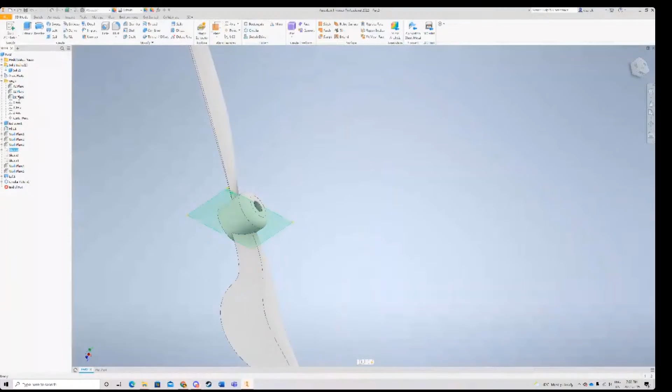I think. Okay, I'm gonna do this really ghetto. I'm just gonna make a sketch on this bottom plane, and I'm just gonna make a line, and you'll see why. This line is just defining the bending point. So if I use the bend part tool, the bend line, I'll use this. You can see it does exactly what it says. It bends the part, and it's pretty neat.

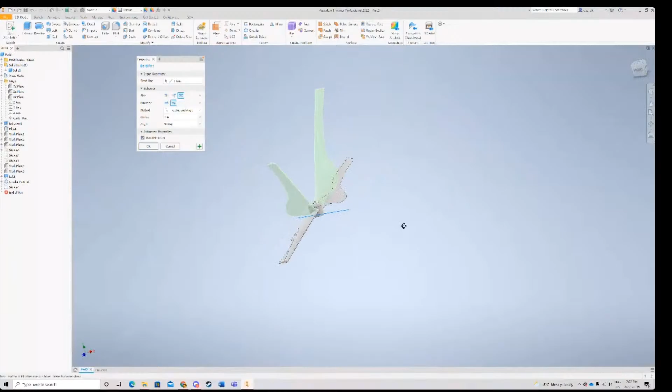What we can do is I'll bend both sides, and I will bend it the other way. And actually, this could look really neat. Why is it defaulting back to inches? I'll do a 10 millimeter because this circle is 10 millimeter, and maybe I'll do a 15-degree bend. So it gives this lifted shape, which some propellers do have, instead of just a straight line. So if you want to bend the part as well, this is what you can do. And it's pretty intuitive what this tool does.

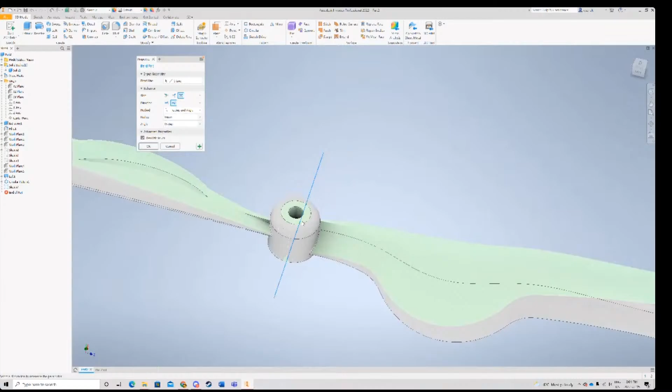Radius and angle. Basically, the radius is how far out from the center line you want the bend to be. I don't actually think it'll let you do less than 10 millimeters here. 9. No, it won't. The reason why it's not going to let you do less than 10 millimeters is because this center circle that we made is 10 millimeters in diameter. So if we tried to bend the part less than that, the circle would self-intersect, and it would cause all sorts of weird geometry problems because there would be a bunch of self-intersections within the circle.

So sure, I'll do a 15-degree bend because that looks kind of cool. Oh, I didn't realize it also bent the center pin, but yeah, I guess it does also bend the center pin when you use the bend part tool. But this is actually a really easy fix. Basically, if we want to restore the shape of the center pin, we can. By the way, the main part is done. I'm just messing around now. I just want to show off some other things that you can do in Inventor.

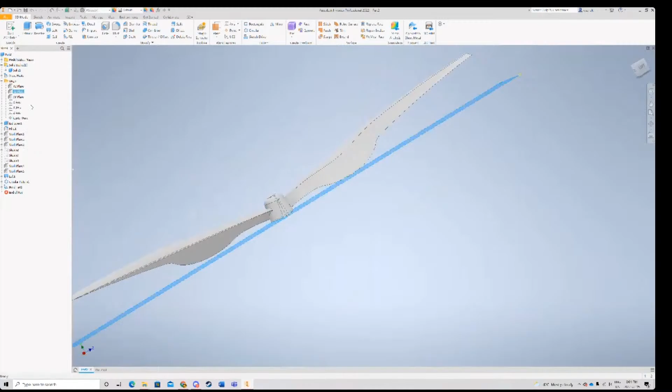Actually, we don't need to make a new sketch. What we'll do is we'll take the sketch from the extrusion that we did the first time. You can make this visible again, and then we can just extrude out the center part. Sure. No, it wasn't. I just extruded the donut and not the center part. So I think, oh yeah, that would make sense. Okay, this is extending a little past 9 millimeters. Maybe I'll just make it 9.3 millimeters, because that'll cover all that.

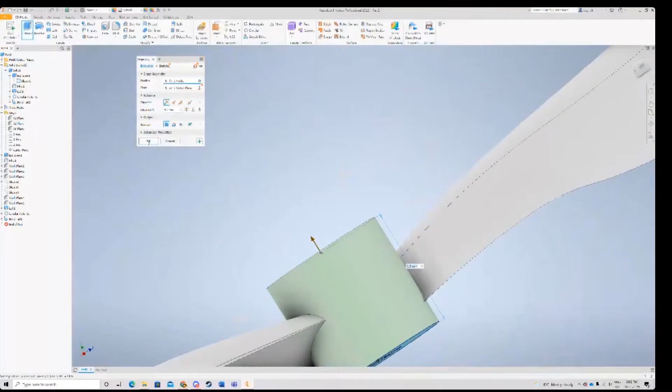9.3, sure, and then, okay, visibility still on. Then I'm also going to extrude out the center bit. Same distance, but I'm going to use the cut boolean instead. I'm kind of just restoring the original shape that this had, except now we get that cool bend that we didn't have before.

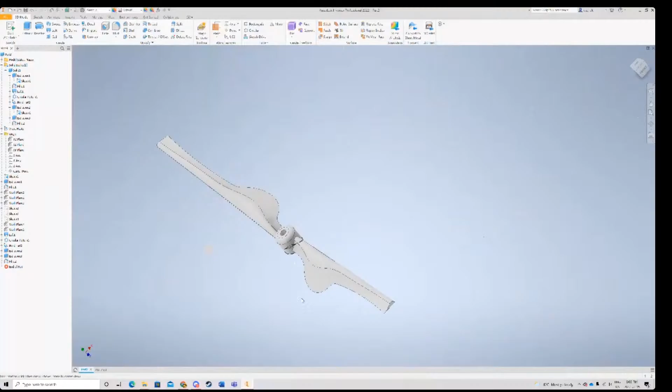And now I guess we can, oh, not the tool, sorry, I misclicked. Fillet this 2 millimeters. All right, awesome. So I basically just reconstructed that centerpiece that got messed up, but now we have this cool bend which we didn't have before, and it's giving this airfoil shape. And this is pretty convenient.

I mean, if you wanted to do a bend, imagine if you just took a rectangular bar and you bent it. It's convenient to do it retroactively, if that makes sense. Because obviously if you had a rectangular bar, you could just make a sketch on the left hand side. Okay, maybe I'm talking to myself, sound like a crazy person, but if you have complicated geometry, it's really easy to do a bend instead of sweeping it along a path.

Because now that we've made this crazy airfoil, if we wanted to make a bend like that, it's not really easy to define with a bunch of features. And I bent it right where it intersected with the cylinder basically.

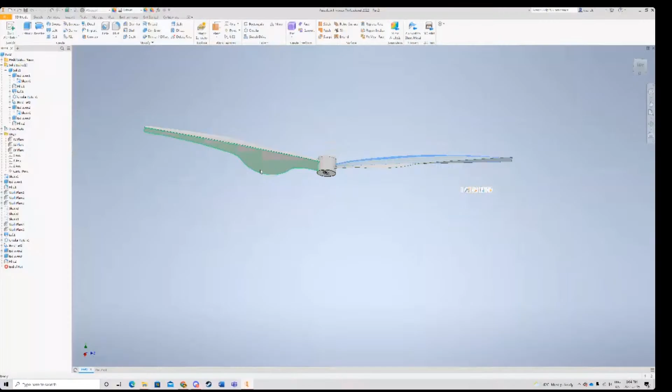But if we use the bend tool and I made the radius maybe 20 instead, and I was bending it in the middle of this airfoil instead of right here, that would be practically impossible. Well, at least with the knowledge that I know. Adrian and Val know more than I do, so maybe it is possible, but it would be very difficult to make.

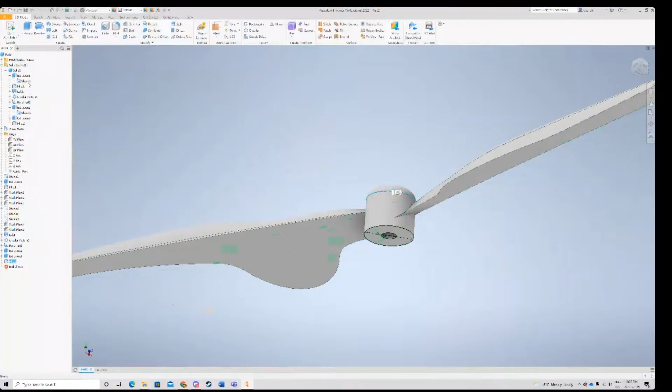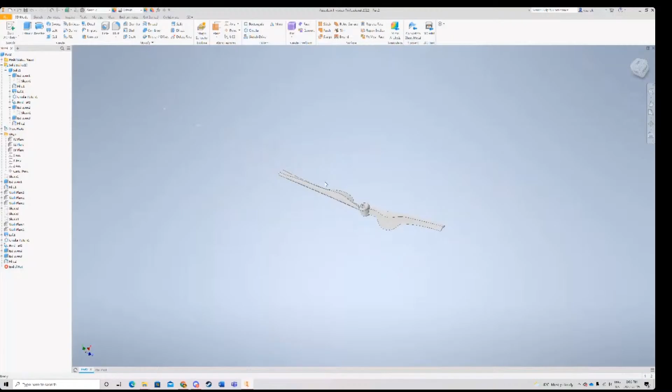Yeah, yeah. Oh, I did not know that. I'm an engineering physics student, so I don't take any of that. I don't know any of that, but it's cool that I was like, ooh, this is a cool shape that I see on actual planes. So, yeah, awesome. Thank you so much. And okay. Okay, let's see what else.

Oh, I could show draft as well. Maybe I could draft the ends also. So what draft does is, well, it has the explanation here. But it's kind of like a chamfer, but not exactly. So it'll take a face. I'll do it on the end here because this end is very straight. And it'll pull the face in a certain direction.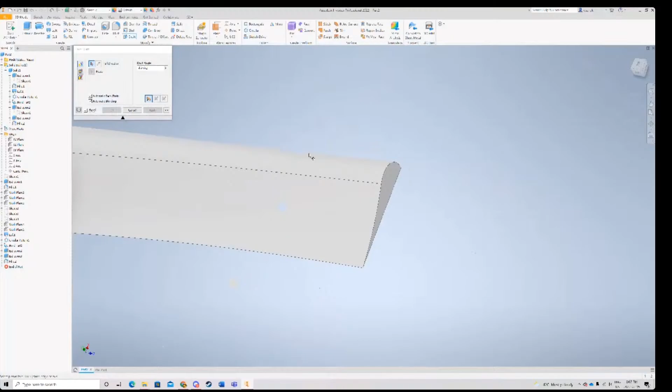Oh, awesome. Okay, you know what I just realized? That tiny little line we made may have been perfect actually for this application. Think about that. Okay. So if I, oh no, okay, that's the pull direction. That's right. If I choose the face, basically I'm taking this face, sorry, and I'm pulling the corner of this face downwards in this direction.

So basically think I attached a metal bar to this face all the way down, like a wrench. So I took a wrench, I super glued it to the corner of this face, and the wrench is extending all the way down to where my cursor is right now. Can you guys see my cursor when I'm showing my screen? Okay. So where my cursor is, think I have a wrench attached to the face, extending all the way down here, and I'm pushing with all my force on that wrench.

So what's that gonna do? It's gonna deform the shape kind of inwards. And you can see if I change the draft angle, okay, maybe because of the geometry of the shape. If Inventor, yeah, okay, create feature failed. If Inventor doesn't give a preview, 99% of the time that means it's not gonna work. But

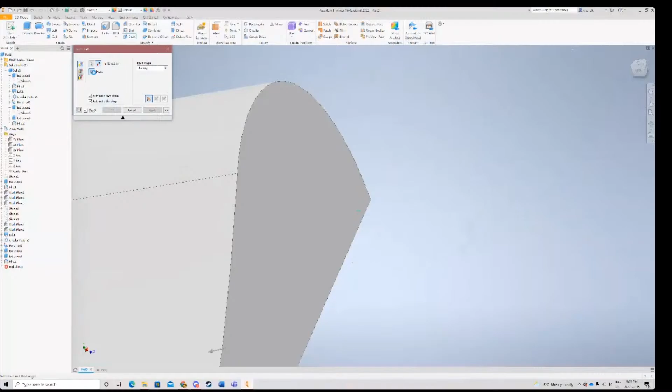Oh, I see, I see. Okay. Oh, my Inventor's kind of, okay, I'll try. I think if I go in the other direction, it might work. So, oh wait, what am I doing? I'll do this on here. Then maybe I go -5. Wait, face is not selected. I just selected. What is going on? This just worked. Why can I not make the selection now?

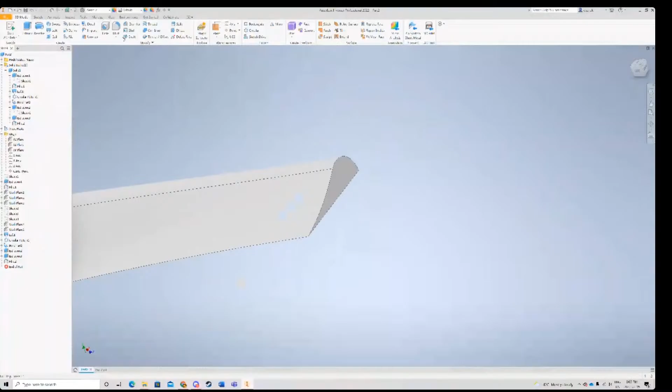Okay, I'll give this maybe one more try, and if it doesn't work, give up. Pull direction here, faces, that. Oh, and maybe if I go, I think if I go in the minus direction.

Okay, awesome. So the minus direction works, but the plus direction doesn't. I think it was because of this leading edge. So when I'm cutting into the leading edge, it's fine. But if I try and extrude out that leading edge, Inventor doesn't know what to do. My guess is because it's so sharp, it's kind of twisting the geometry. I don't really know how to describe it, but the geometry will cross and the insides will become the outsides.

It's kind of weird. I don't really know how to describe it until you've seen broken geometry in Inventor before, but the insides will cross and become the outsides if a point gets too small. You can kind of see it if you do a loft and you loft up with a really high taper angle.

But anyway, back to that wrench analogy with the draft. Basically now instead of pushing the wrench really hard with the negative angle, I'm just pulling the wrench really hard. So this face is getting pulled backwards. You can see instead of it being at 90 degrees, it's kind of pulling back into the aerofoil.

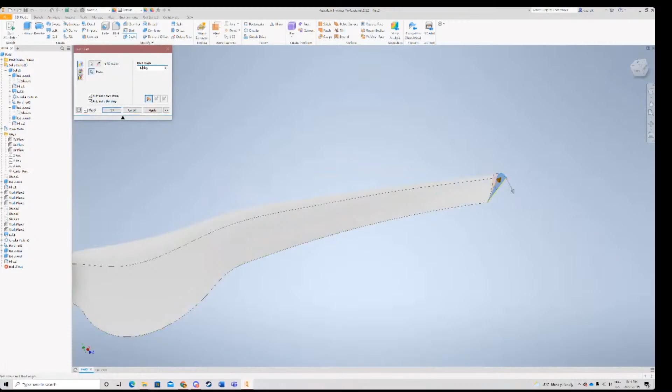And if I made it higher, instead of 26, I made it 40. I think the max I would be able to do this is 90 because it doesn't really make sense to go any further. Yeah, 90 doesn't even work, but 89. Okay, that's what I figured, but sure, we'll do a 40-degree draft. Okay, that looks a little weird.

Maybe you could clean up that corner a little bit, but there are so many things intersecting in this corner. I doubt that you could just do a fillet because a fillet would be between two edges, but there are three edges joining here. So I don't know, we can fix it up later. But now you can see, sorry?

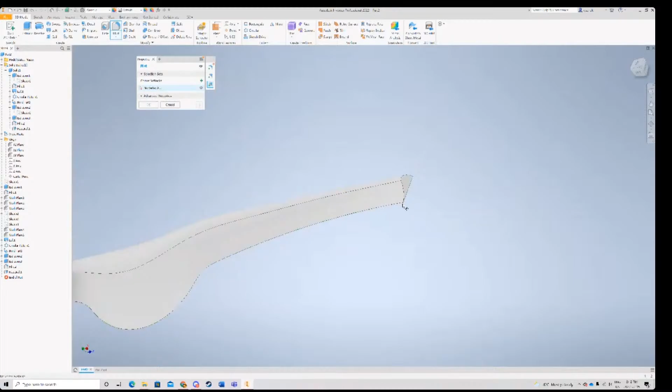Let's say corner setback, maybe. I've never used it either. So no, I don't know. Yeah, weird. It does seem like that is a real corner. I thought maybe it wasn't recognizing it as a corner because sometimes in Inventor it's infinitely small, but it's not quite a corner. But I don't know.

Whatever. Okay, it looks kind of weird now because that's on one side, not the other. Actually, I don't know if I can get the draft working correctly on the other side. Maybe I'll be able to do it really fast. So there, faces here, draft angle -40. Wait, or maybe it would be 40 degrees since it's on the other side. No?

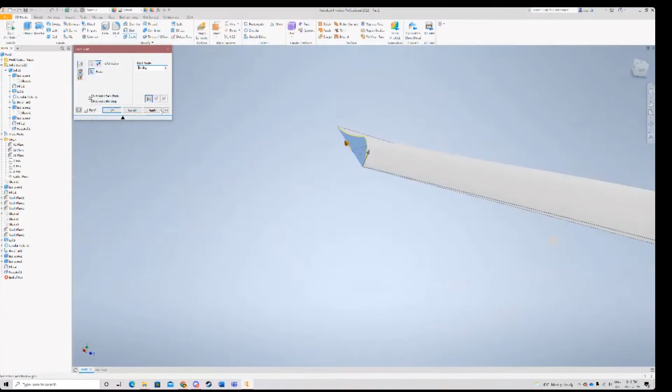Interesting. But it doesn't seem, huh. That's weird because this is identical. It literally was defined to be identical to that one, so I don't know why it's not working. Maybe I just defined it wrong. But you should also be able to do a draft on this side.

And worst case, if I couldn't get it working on the other side, I would go back in the feature because we're not that far in the tree. I would do the draft before I mirrored it, and then it would automatically apply. Actually, I don't know if you can do it in Inventor, and it might crash my Inventor, but you drag the feature. Oh, you can. Uh oh, but I can't drag the face draft before the circular pattern.

What if I drag it all the way? That didn't work. Oh, it's because I think the one I did the draft on was the mirrored one. Wow, I had a 50-50 shot and I blew it. Awesome. Okay, I'll move it back.

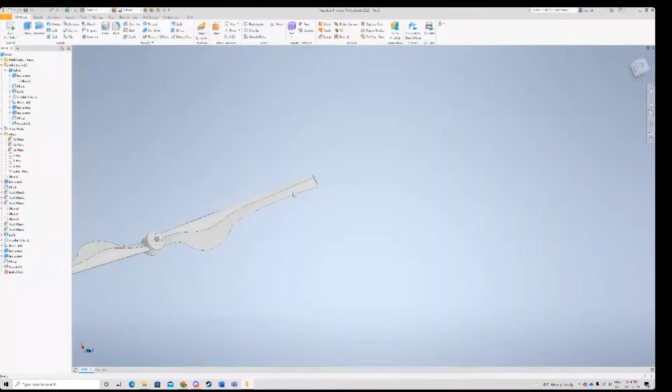So basically, what I was trying to do there, I'll explain a little bit more, was I made this draft and I could get it working on one end and I couldn't get it working on the other end, even though it was identical. And if I'm being honest, sometimes that's just Inventor. Even when I was making this propeller for the first time, I tried to make this loft identical. I literally followed the identical procedure.

When I got to the end of the loft, it said loft feature failed. Usually that happens when you don't define something correctly, but I knew that I defined everything correctly. So I was like, what the hell is it? I clicked save on my part. After I clicked save on my part, it worked. And it's just like, why? I don't know. Nobody knows. Inventor sometimes just does random stuff.

So if you really can't figure something out, I would say the easiest thing is try saving your part, try turning it off and on again, and then try troubleshooting after that. Because you can spend hours on something and it'll be something that wasn't even your fault at all. It's just Inventor being Inventor. And my guess is this thing would just be Inventor being Inventor.

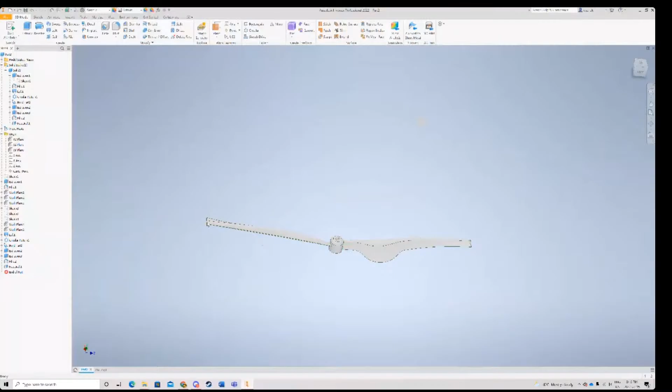But if I couldn't get it to work, one fix that I was thinking of doing was to move this feature in the tree to before I did the circular pattern. And by doing that, it would mirror this feature onto the other side. Because if you imagine we did this draft before we mirrored it, then we would get the same thing on both sides. But the problem is when I made this draft, I made it on the opposite end.

If I click the circular pattern, this is the original blade. The reason why it's showing under is because we did that bend part thing, but this is the original blade and I did the draft on this end. So even though I moved the draft to before the circular pattern, nothing happened, because I would have had to do the draft on the original part feature that wasn't rotated 180 degrees in order for that to work.

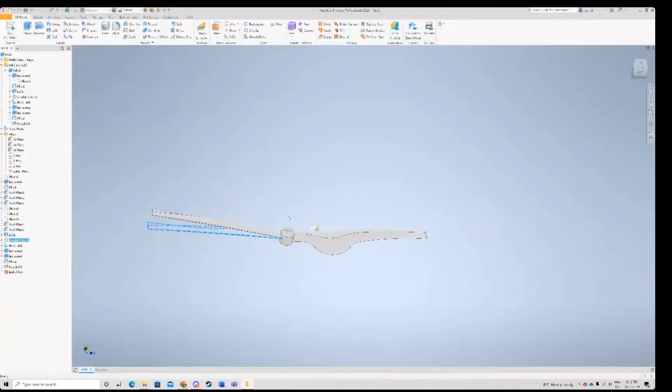So yeah, that's why my hack didn't work. I had a 50-50 shot at doing the draft on the right face. I messed it up.

What else? What other tools do you think maybe could show off in the 3D workspace? I have one. Not necessarily 3D workspace, but I think it's really useful, and it should only take 5 minutes. So if you have your part here, and you go up to the Manage tab at the top, and click the button that says Create iPart.

Okay. It's a little hard for me to see. Oh, it's okay, I can make it bigger. That's a little better, but it doesn't help the font. My bad.

So basically, what we see here is we have all the features of our part in the left half of the screen, and we can add one of those dimensions to the right half of the screen. So go find the dimension for your bend feature, wherever it is. Find the angle dimension, and then put it over to the right side. Do I just drag and drop? You just click that. There you go.

So now on the bottom half of this window, you see how there's a little table there? The member part number table. So if you insert new rows in that table, I think you just right click, insert row. And you do that, let's have three different rows, for example. Make one more. Yeah, I kind of see where this is going. This is new to me too, but why can I not? Oh, there we go.

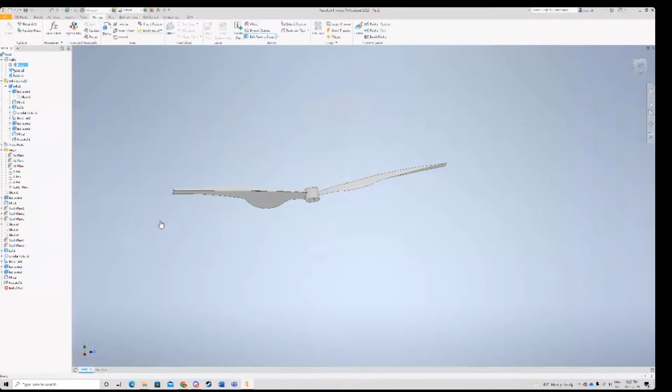And if you right click that in your model tree, if you right click one, then you just hit generate files. Then it just asks you to save. Oh, I actually haven't saved this part. I haven't even saved this part since I started the workshop. Dangerous.

Propeller one. So now that you've saved it, what generate files does is it creates their own IPT files for those other parts you made. So that's pretty neat. And yeah, just a question about

that feature. So if I were to keep making edits to the original part down the line, will those be applied to the table features or no? Would it keep updating as I was editing? I think so. I guess that's something we could test right now. Oops, didn't mean to do that.

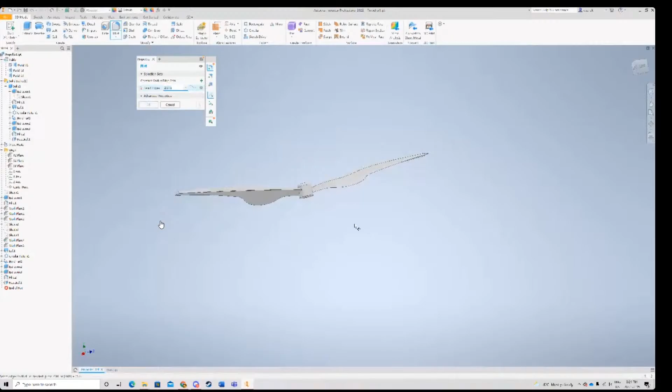I'm not entirely sure, but I think it would. You might have to go back and do the create iPart again, but I don't think you'd have to make any edits to your table or anything. I haven't tried it. Oh, it does. That's neat. So you could do that at any time, and as long as the edits you make are compatible with the different angles, it'll keep updating the part

as you make changes. This is starting to look like a Lego head now. It looks kind of like an angel Lego head with wings on the sides. We just add the thing up top here.

I don't know if Dr. McDonald's done it yet for first years, but one of the bonuses was to design a Lego feature, a little mini Lego guy, and he would feature the best ones. You would have a vote for what the best ones were. So if you guys want to take inspiration from this, not on the head, but if you're making your Lego part, you can give it wings on the back. You can follow a very similar process to what we did here.

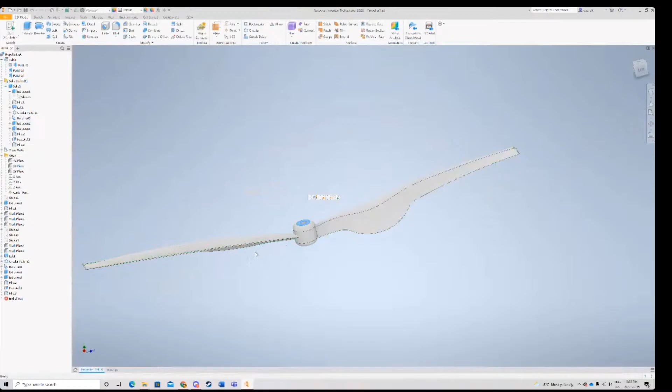And instead of making a helicopter type shape, what you could instead do is make a wing type shape. And something you could possibly use, I usually do this in Fusion, so I'm not sure how it works in Inventor, but the canvas tool is, if I make a sketch here. Oh, is it image? Okay, I don't know.

I don't have an image ready on the fly, but basically what you can do is put a picture on the body you were trying to make. So for example, if it was your Lego head, you could use that control point spline that I used to trace the shape of the wings. And then you could extrude out those wings and then bend them to make them look neat like this. And that would be something pretty neat.

Maybe I'll see if I can speed run that on a new part in like 7 minutes. Unless, Adrian, you have anything else you would like to share for this part too. Yeah. Okay, awesome. Oh yeah, I guess